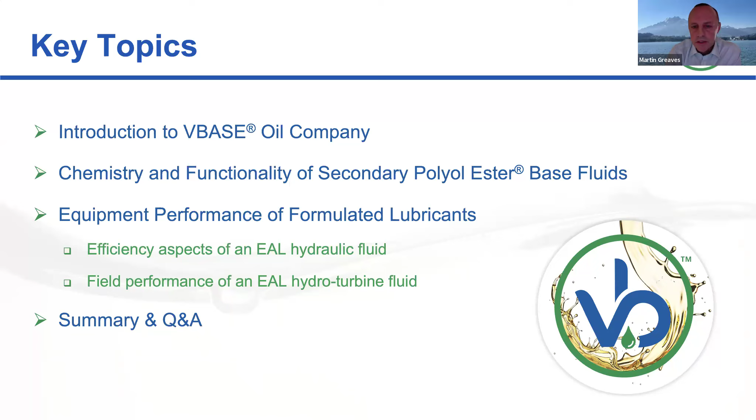Go back to you, Martin, for the agenda. Yeah, thanks, Stephen. So the flow of the presentation will be: Stephen will introduce the VBASE Oil Company, and then I'll take over and talk about the chemistry and the functionality of secondary polyol esters. If you're not familiar with our product line, I'll introduce you to that. Then we'll talk more specifically about the equipment performance of some formulated lubricants that we are developing as part of our technology package to help formulators formulate secondary polyol ester-based products as a base fluid supplier. I'll talk about the efficiency of an environmentally acceptable hydraulic fluid based on our technology, and also the field performance of a hydro-turbine oil that we have developed. And then we'll wrap it up with a Q&A. During the presentation, I will pause at certain points. If you have any questions, as Robert said, put them in the chat, and Stephen and I will be delighted to try and answer those.

So pass it over to Stephen to introduce you to the VBASE Oil Company. Excellent. Thanks, Martin. The VBASE Oil Company is a company that started in 2021, but the genesis, the technology, was a few years prior. The mother company that spun it out is called Tetramer Technologies and is based in Pendleton, South Carolina, right outside of Clemson University. And that's where the commercial and the R&D center are located for VBASE Oil as well. The genesis of this was actually a separate program altogether, but the team quickly realized it can be utilized in industrial lubricants as well. And so a lot of the early time was really developing that early value proposition, understanding the technology in the applications, and developing the data, on the physical and chemical side of things, to understand it.

And so we were able to launch the technology in 2022, starting with the lower viscosity grades, ISO VG 32 to 68. As a startup, we prioritized a lot of the investment dollars into really making this easy to use in the lubricants industry. And so a lot of the monies went into registrations or credentials. In the early years, all of these became fully registered from a TSCA and a Canadian DSL perspective in the Western Hemisphere, from Canada to Argentina, and then also starting to build a global profile with EU REACH listing and getting food grade certifications of NSF HX-1.

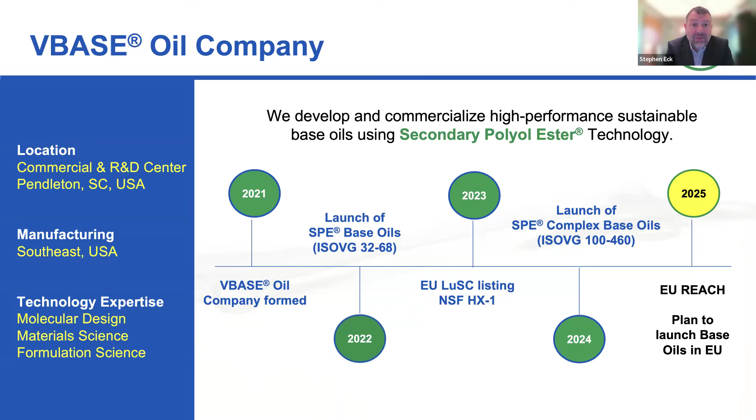So I'll pass it back over to Martin to go into a little more detail on the chemistry.

For those chemists amongst you, we can describe these secondary polyol ester-based fluids as alkoxylated polyol esters more specifically. If you take a look at the structure on screen, I can describe the functionality of these products. The R1 moiety is simplistically based on an oxygen-rich polyol. The way we make these materials is that we take the alkoxylated polyol, and with the secondary hydroxyl groups, we convert them to synthetic esters.

We can use either oleochemically based or petrochemically derived fatty acids to conduct that esterification. So by building a lot of oxygen into that R1 backbone, we can, for example, improve the thermal management properties. I'll share some data in that area.

We also improve the detergency, so these molecules have inbuilt detergency, so to speak. And by building a lot of oxygen into these types of synthetic esters, you can elevate the VI versus classical conventional esters of similar viscosity grades.

That R1 group is also based on a bulky branched polyol that helps with low temperature properties, particularly for the lower viscosity grades. It also helps with hydrolytic stability.

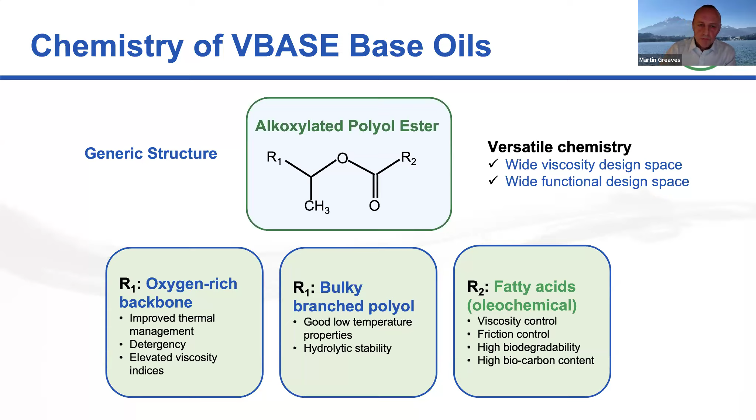For those of you not familiar with our product line, I'll walk you through this. With regards to the alphanumerics in the nomenclature, we cover the ISO viscosity range 32 to 68 for the lower viscosity series of products in our line. You'll see that the S grades are saturated and the U grades are unsaturated.

Taking a look at some typical properties, the VI values range from around 160 almost up to 200, but they tend to be higher VI values than other types of conventional esters. Perhaps I can give an example: if you look at the VI value of VBASE 32S, it has a VI value of around 162.

If you compare that with a similar viscosity grade adipate ester, for example, it's typically around 20 VI points higher. You'll also see that the low temperature properties are very favorable for this line of products, down to -60 degrees C on the pour point.

If you look a little further down the table, particularly the fire point data, and especially the fire point data for the VBASE 46U and 68U, you see their fire points are north of 320 degrees C. We've had a lot of interest in those products for developing fire-resistant fluids, particularly HFDU fire-resistant hydraulic fluids. Not only are the fire points quite high for that type of product, but these products have a high density of oxygen within their molecular architecture, so their heats of combustion are much lower than, for example, petroleum oils and lower than conventional esters classically used in this type of application.

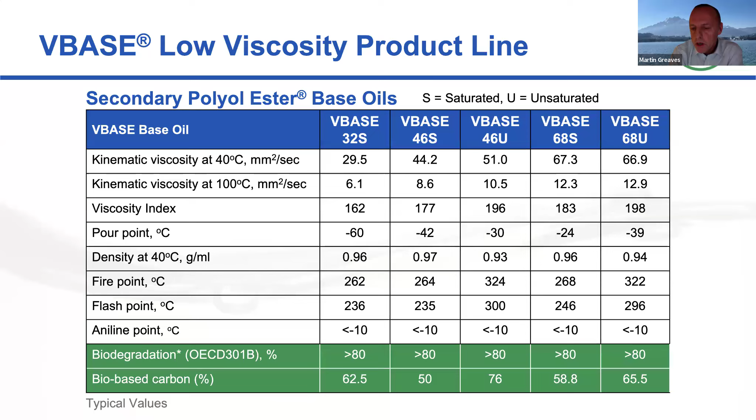You'll see in green that all these products are readily biodegradable, and they also have a high biocarbon content, again north of 50%.

Switching over to our complexes, these are higher viscosity products. We have products in the range ISO viscosity grade 100 to 460. These products are all saturated, and you can see their VI values range from about 185 to 213 for this series. The pour points are higher than the lower viscosity products, because these are bigger molecules. We can correct the pour point if needed by using conventional pour point depressants, such as polyalkyl methacrylates.

The fire points, again, are quite high for this series of products. And again, the aniline points are below minus 10 degrees C. Also for this product line, all the products are readily biodegradable and have a high biocarbon content.

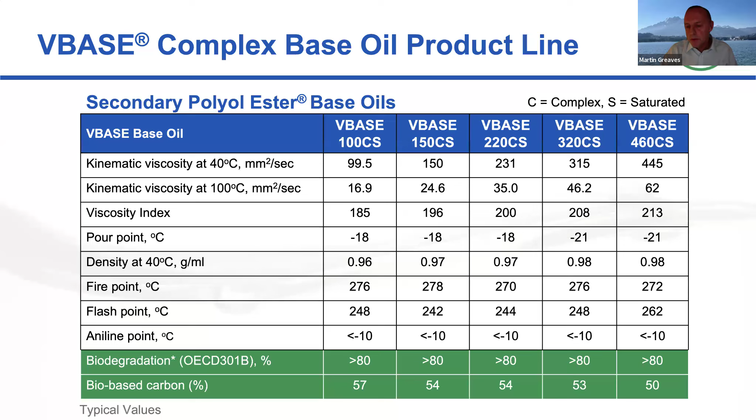I'll just pass it over to Stephen to talk about the environmental and safety performance of these products.

Yeah, absolutely. Thanks, Martin. As noted in the last two slides, the conversation really starts with some of the physical and chemical performance benefits of the technology, but depending on what your applications are, we wanted to make sure they were fully ready to enter any of the markets now and any regulations that may drive into the future. So truly, these molecules were designed to have both performance and green credentials, designed for sustainability.

As mentioned, they're all high content of bio-based materials, all readily biodegradable, including the complex esters all the way up through 460, all non-toxic and non-bioaccumulating. All 10 products you see here are on the LUSC list for the EU and are on the USDA certified bio-based product list.

Depending on where you want to use these molecules, they can go just about anywhere in the application space. That's part of the simplicity of using the VBASE technology in a wide variety of uses. We understand complexity management and base oil tankage and other things are at a premium, so we wanted to make sure that one of the fundamental design principles of this technology was ease of use and breadth of market space applications.

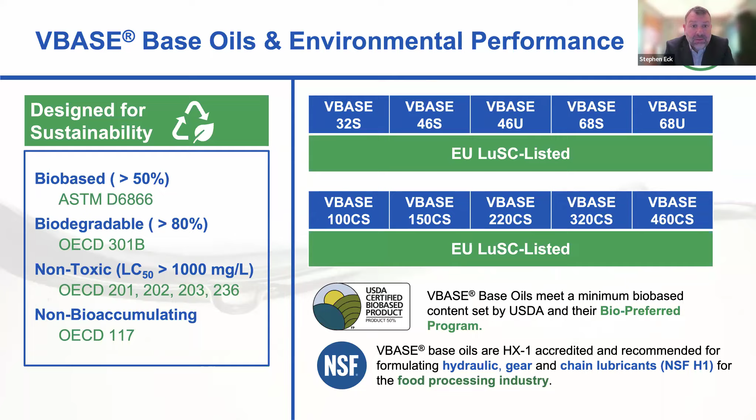So we'll just pause there and ask if there are any questions on the product chemistry or indeed the product's functionality.

Currently, Martin, there's nothing in the chat. Okay, great, let's keep moving then.

So we want to transition now to talk about the performance of some formulated products. Just to re-emphasize the point Stephen made a little bit earlier, we are a base fluid supplier, but in order to drive the growth of these products in the market, we need to develop a lot of knowledge of how to formulate with these products.

Of course, we're developing a body of knowledge around formulation science, but not only that, we're also taking it a step further by generating equipment data, so looking at the performance in real equipment and sharing that data with, for example, the team on the call today and, of course, the industry in general.

Before I dive into a lot of the equipment performance data, there are really 4 aspects I want to talk about with regards to functional performance of these products. We truly believe these can offer better heat management, particularly in terms of their higher volumetric heat capacities, and I'll be sharing a little data in the next couple of slides around that key point. We'll also be talking about improved efficiency or improved productivity when it comes to equipment performance.

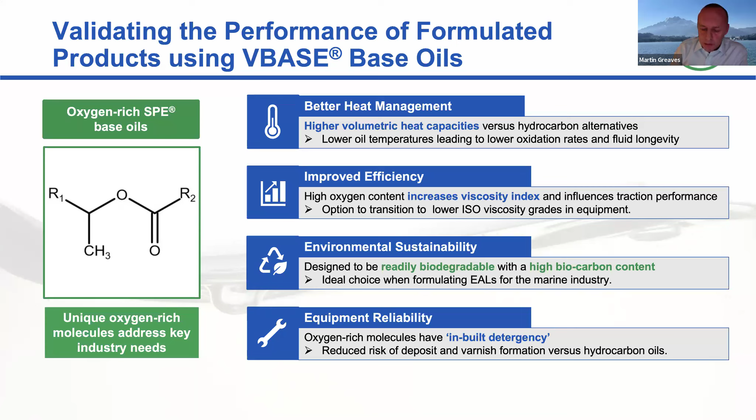So I'll talk a little bit more about these, but I'd like to talk about thermal management. When you look across the industry, there's actually not a lot of published data on the thermal physical properties of base fluids, and indeed formulations based off those. Occasionally you'll see some data based on specific heat capacity of base oils, but what I feel is very important, and more important than specific heat capacity, is the volumetric heat capacity of base fluids and formulations derived thereof. Why is that? Simply because when we fill a piece of equipment, we typically fill that equipment by volume and not by mass.

So our team earlier this year has been developing a body of knowledge around base fluids and how our VBASE technology compares with other base fluids. What you see here on screen is the volumetric heat capacity of some ISO 46 base fluids. So we've got a group 2, a group 3, a polyalpha olefin, and our VBASE 46S. At the three temperature measurements we've chosen, 25, 50 and 80 degrees C, the group 2 and group 3 show very similar volumetric heat capacities. The polyalpha olefin is somewhat lower than the group 2s and group 3s. But with the VBASE 46S, you can see it typically has a volumetric heat capacity at 80 degrees C somewhere between 9 and 25% higher. So if you're looking to improve the thermal management of your lubricant and equipment, the secondary polyester technology may be a really good starting point for formulating future generations of fluids.

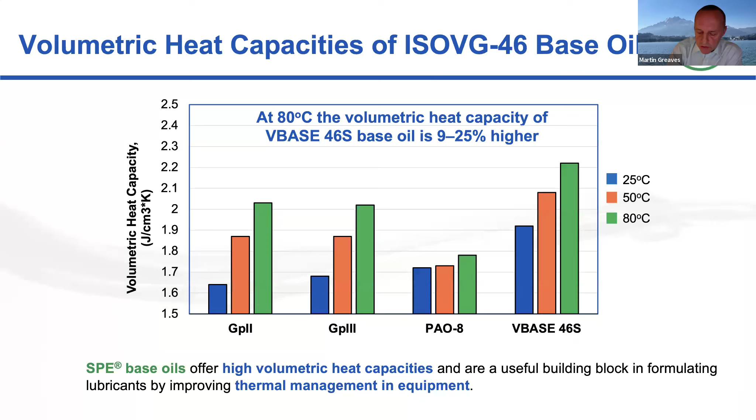Now, you may be wondering. Sorry, Martin, have you got my picture? No? No, I don't think so. I don't know why, but sorry.

I just have a question about the chemistry in the end. Can I bring out my question here now or not? Yeah sure, I'm happy to take it now. Okay, sorry for interrupting. I have a question about turbine oil, and if we formulate the turbine oil, for example VG32 or 68 or over 100, you know that some crucial factors are so important for the turbine, for example cleanliness, emulsibility, foaming characteristic, and other factors like hydrolytic stability, oxidation, and RBOT.

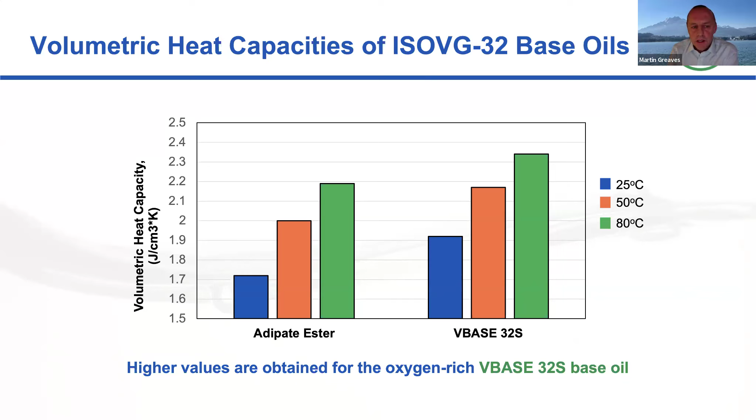So if you compare an adipate ester at iso viscosity grade 32 with VBASE 32S, as we've done here, at the three temperatures that I mentioned, we see there's around a 10% improvement or increase in the volumetric heat capacity. We think the reason for that is because we built a lot of oxygen into these molecular architectures, which is delivering that higher volumetric heat capacity.

So now we go into equipment testing. We're going to start by talking about the efficiency testing of a hydraulic fluid that we've developed within the team here.

The data that I'm going to share with you has been generated by the Milwaukee School of Engineering, particularly by Paul Michael. For those of you that know Paul, he is a world leader in hydraulic fluids and hydraulic fluid testing. We've been working on a program with him through my colleague Zach Hunt, who's on the call now, looking at the whole range of different chemistries and the hydraulic efficiency of those chemistries.

I'd like to share with you a condensed form of all the data we've generated, and hopefully it sparks some interest. So Paul has a hydraulic dynamometer testing facility that you can see there on the photograph.

This is based on a radial piston motor, an axial piston pump, and a 25-gallon fluid reservoir. He's conducted testing of a range of different fluids at 50 degrees C and 80 degrees C. The data I'm going to share with you today is simply based on 80 degrees C. There's a huge amount of data that's been generated as part of this program.

The goal of the program was to look at the effect of fluid selection on hydraulic system efficiency. The data I'm going to share with you now simply compares two fluids: the VBASE technology versus a leading petroleum-based brand hydraulic fluid. If you're in the hydraulic fluids world, you would know this type of product.

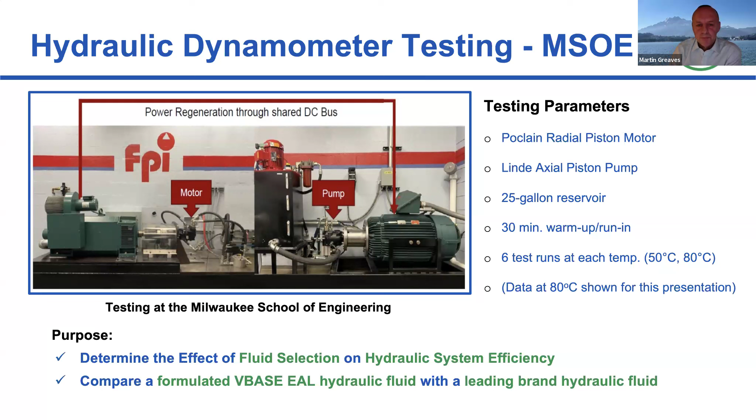What Paul and his team have done in terms of making measurements on the dynamometer is focus on two aspects: the motor torque loss, which is the estimated power losses due to friction, and we know that lower motor torque loss translates into higher work output.

What does that mean practically? It means that if you've got an excavator, you can fill a bucket faster or maybe even push a load further. He's also looked at system flow losses - I'll show some data on that.

This is an estimation of the power losses due to leakage or compression, for example. We know as well that lower system flow losses translate into lower power input. What does that mean from a practical point of view? It means you can swing a boom of an excavator or make a turn quicker and so on.

Our industry often talks about increased efficiency, but really at the end user, I think it's fair to say they're more concerned about the increased productivity they can derive from that increased efficiency. So as part of this work, we're looking at designing lubricants that can increase the work output and reduce the power input.

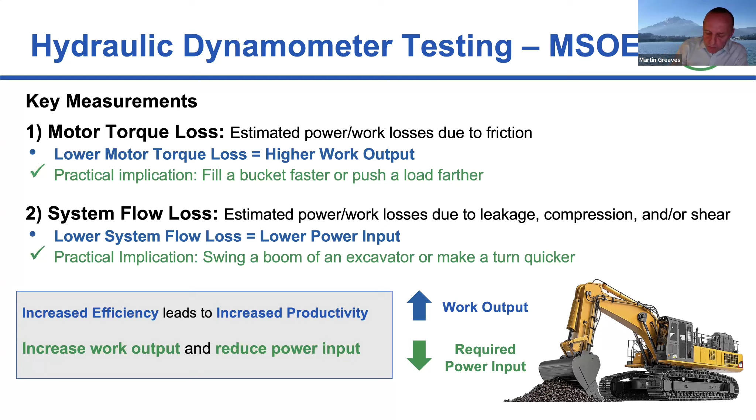The two fluids that we're going to talk about in the next few slides, as I mentioned, is a petroleum-based hydraulic fluid - an industry leader - compared with our VBASE technology. What I want to do here is compare some of the key points of these fluids.

You'll see that for the industrial hydraulic fluid, it has a VI value of around 114. I think for this type of equipment that this fluid was designed for, the use of VI improvers was probably not realistic because of the high shear stresses involved in these systems.

You'll see that the industrial hydraulic fluid has great low temperature properties, low pour point, good pumping viscosity of -30 degrees C. It has an air release time on their technical data sheet of less than 4. I actually consider that value to be quite high for an ISO 46 viscosity grade.

It is an improvement versus previous generations of this type of fluid. But nonetheless, I think a value of 4 is quite high. It does have a very good TOST life here of greater than 5,000 hours.

Finally, we believe that this product is based on a ZDDP anti-wear package. We've looked at the ICP measurements, the zinc and phosphorus content, and you can see that they're around about 90 and 73 ppm. On the right-hand side, you can see the data for the VBASE product.

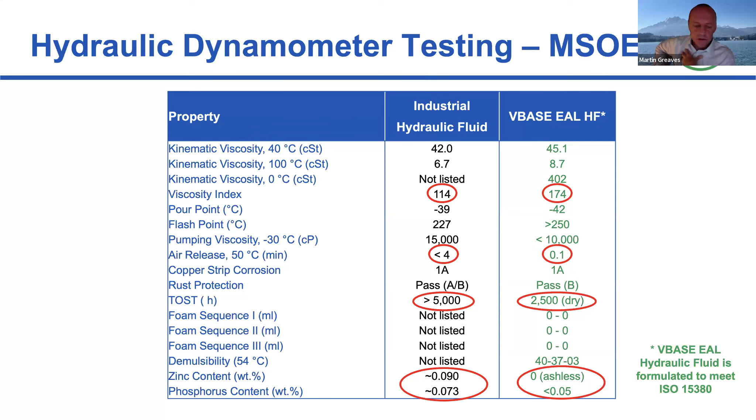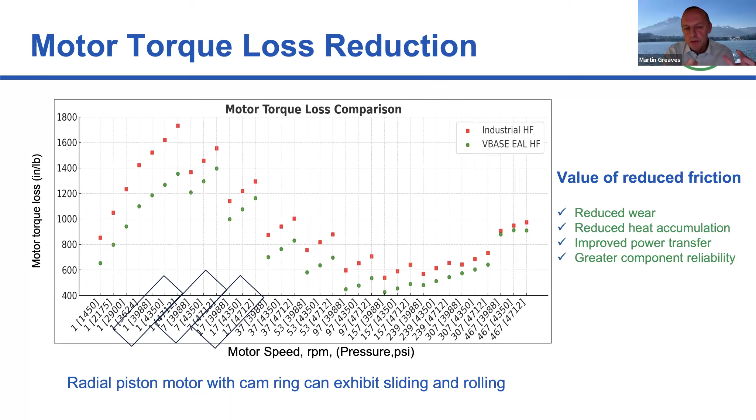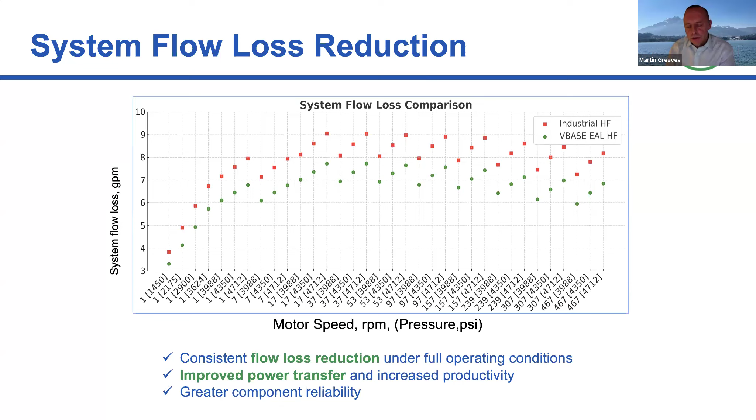So that's consistent flow loss reduction across that full operating regime. That means that we've got potentially improved power transfer and ultimately increased productivity. And that might in turn lead to greater component reliability.

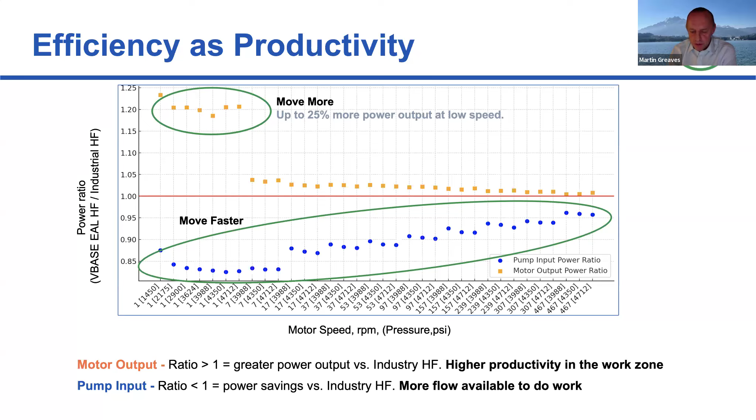Also, with regards to the blue dots here, the pump input ratio preferentially needs to be less than 1. If we have that, then we have more flow available to do the work. So we've been really delighted with the data generated on our fluid versus that industry standard product.

And what we're doing in our company at the moment is generating more equipment data, looking at wear performance and component life and so on versus industry standards for this fluid.

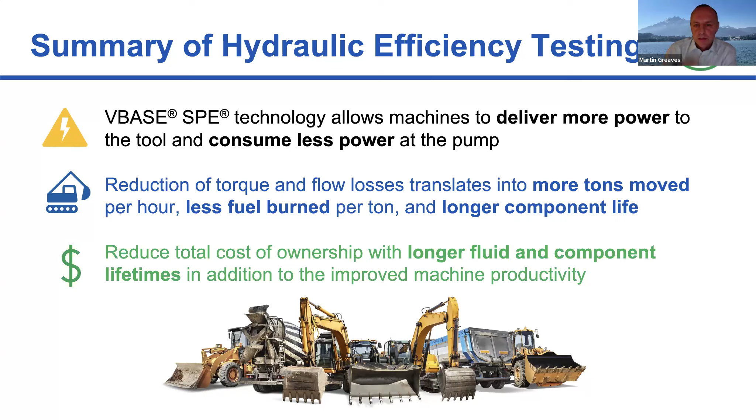So I'll just pause there and ask if there are any questions on the hydraulic efficiency testing. Hi, yeah, I think we had one, but this one seems like it was answered.

There's one from Patrick that says, can you tell us more about the density behavior or expansion coefficient with delta T? Speaking of thermal management, can you expand on the thermal conductivity?

Yeah, I may bring in my colleague here, Zach Hunt, who's been very familiar with the actual testing. From a thermal conductivity point of view, the values we've seen for the secondary polyol ester technology tend to be a little bit higher than conventional hydrocarbon oils, so that's a starting point. In terms of the expansion coefficients and so on, I don't recall us actually measuring that, but I'm going to defer that question to my colleague Zach, who's on the line and might be able to add to my answer.

Sorry, I was trying to find the microphone. Generally, for the thermal conductivity versus group 2 through 4 oils, we've seen about 5 to 10% higher thermal conductivity with the VBASE secondary polyol ester base oils.

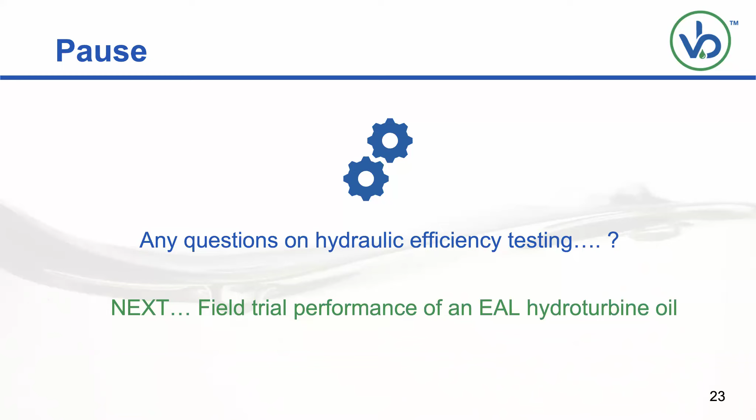Okay, we'll go on to talk about a case study on a hydro-turbine oil.

As Stephen mentioned earlier, the genesis of our whole business goes back to a grant that the Tetramer team, the mother company of VBASE, secured in order to formulate a hydro-turbine oil as part of a Department of Energy grant. The team developed that hydro-turbine fluid by designing the secondary polyol ester chemistry. Since that point, I've taken that development further to generate some equipment data.

I'd like to share that with you, particularly data on the condition monitoring of that fluid in the field. To put a face on this fluid, this product is

Now, in order to secure a significant field trial, we had to go to GE in Switzerland and run this product on a combined thrust guide bearing test rig. They ran this at different speeds from 400 to 800 RPM with applied loads up to 13 megapascals.

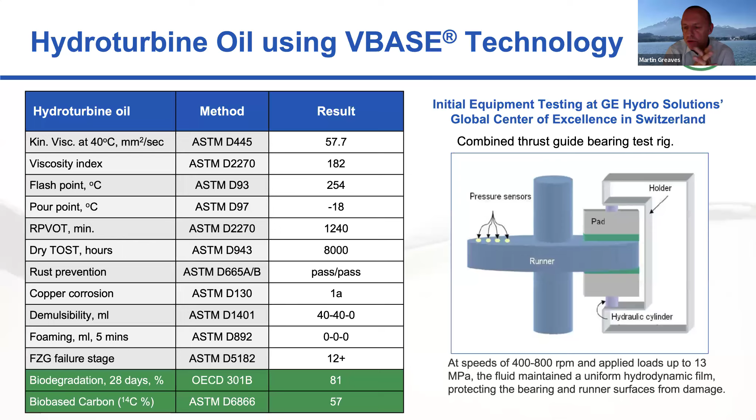So, very good uniform hydrodynamic film, which then allowed us to transition into a full field trial in Sweden.

Our team put together the formulation, of course, and we ran a trial, or are running a trial at the hydroelectric power station in Sweden. This is a large-scale installation of our VBASE Hydro T-EL product. The product is in a U8 turbine there, and this is, of course, a joint collaboration between Andritz, GE Renewable

Energy, and Vattenfall. The goal of this trial really was to demonstrate equipment reliability, but also to ensure that we had full fluid stability in full-scale service.

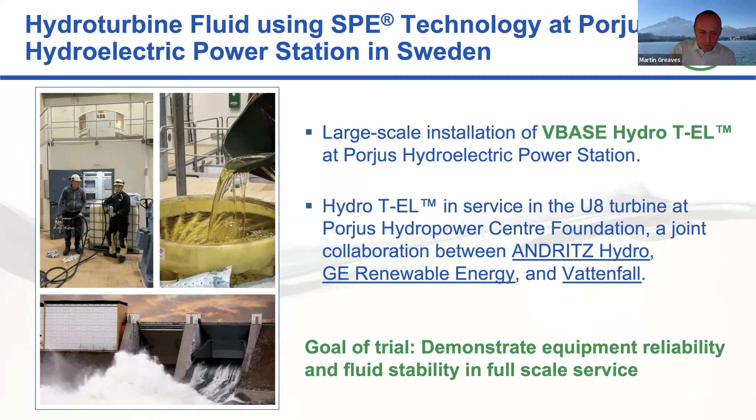So I'll share with you some data here. The product has been in the equipment for about 18 months now. We've got the first 12 months of data here. This is data that has been measured by Vattenfall, so they share that data with us from time to time.

You look at the viscometrics in the table on the left there, and you see that the product is very, very stable from a viscometric point of view, which we're kind of delighted for. We track the acid number, of course, and there was a blip up on the acid number after 6 months. That seems to have stabilized after 12 months. We're quite interested in what the 18-month data point will tell us on that.

The water content in that equipment varies between, as you can see there, 500 ppm and 1200 ppm. I rather feel that's seasonal.

The demulsibility of the product, back to the question we had earlier, is excellent. And the air release time, as you can see, is less than 2, showing very fast air release.

Interestingly, if you look at the particle count here, the fluid seems to be getting cleaner over the trial period. This might come back to the fact that we have this inbuilt detergency within the fluid, helping not only the fluid to stay clean, but also the equipment to stay clean.

On the right-hand side, you can see we've tracked the ICP data, the metals analysis, and we didn't see any significant changes in the elemental analysis over that 12-month period, which suggests there's no issues with, for example, corrosion occurring or wear metals forming.

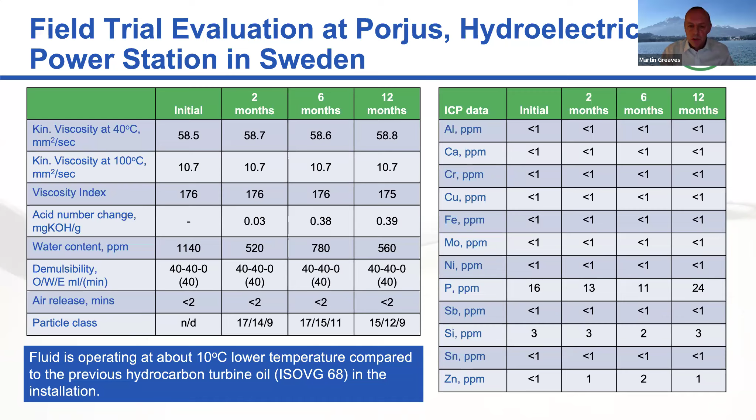So we're going to be conducting many more trials over the coming years to really validate that the volumetric heat capacity does play a very important role in heat management of equipment.

So I will pause there one more time and ask if anyone has any questions on the turbine oil trial.

It looks like we have a question here from Robert saying, any testing or case studies with hydrodynamic bearings? No, not at this point, no.

Okay, this is a long one. So when we are using mineral or synthetic oil, cleanliness testing is a major issue in the hydraulic fluid. Very difficult to measure the cleanliness or particle count if the fluid is contaminated with dark color contaminants or water. What is your suggestion for this, VBASE used oil cleanliness code testing and measurement?

Yeah, we've simplistically used the ISO 4406 test method for looking at cleanliness of oils. I think that's an industry standard test method, but nothing beyond that.

Okay, I think you answered the second part, which is what ISO, NAS, ASTM, DIN method can you use to determine if the fluid is contaminated with other fluids or contaminants?

Yeah, I think if you were to do a forensic analysis of the oil, we would probably use more sophisticated spectroscopic and chromatography techniques to look at any contamination. We'd also look at, for example, using ICP, as I mentioned earlier, for looking at elemental analysis as well.

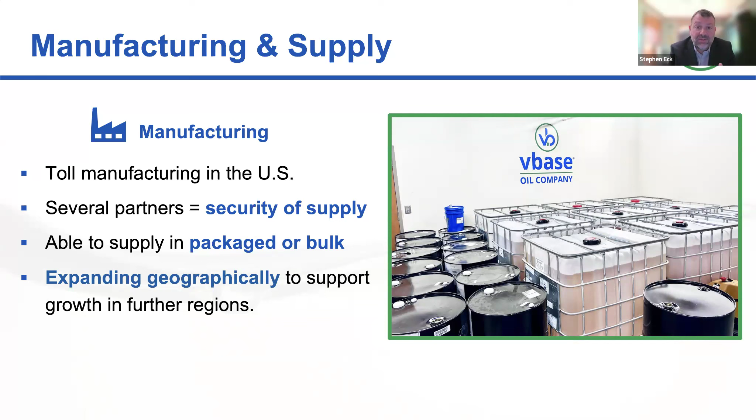Then as far as how to learn more, I saw that there was a question in the chat regarding this. So we do have a dedicated email address, samples@vbaseoil.com, where we can take requests for that. I encourage you to go to our website, vbaseoil.com, because it is quite extensive, has a lot of the data that Martin has been showing and referencing, a lot of the product specific data, applications where we think our products fit best in, those recommendations, case studies, sustainability goals, and then all of these efforts that we're doing with regards to podcasts, articles, and news. And there is an online sample request form there as well. And or if you reach out to Martin and I, which will share our contact details, we can happily assist you with that as well.

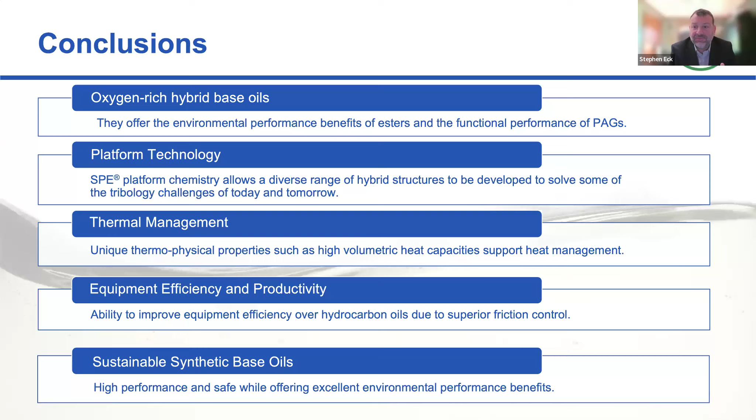So this chemistry is new to our industry. These are oxygen-rich hybrid base oils. They have a lot of the environmental and functional performance of esters and the functional performance of PAGs. As we mentioned earlier, this is a platform technology, so we can bend the molecules lots of different ways to get the optimum functional performance. And our research team will be continuing to optimize the technology for the tribology challenges of today and tomorrow.

I mentioned these products have really interesting thermal management properties, particularly the volumetric heat capacities. That can, of course, help with solving some of the heat management issues in our industry. Of course, we talked about equipment efficiency and productivity through the case studies that we discussed. And finally, I would say that these are really high performance, sustainable synthetic base oils. So not only delivering high functional performance, but also they have the icing on the cake from the point of view that they have very good environmental performance benefits as well.